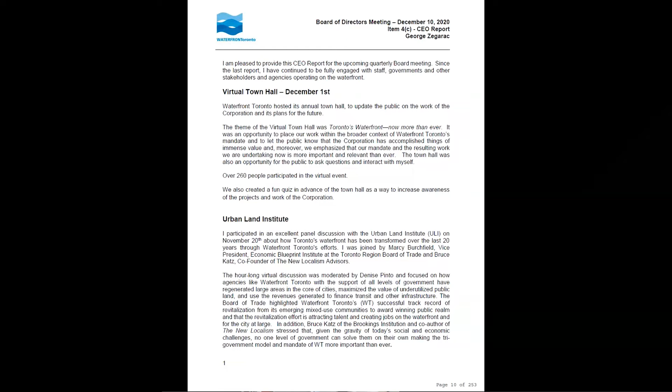We also, on our mission, and I give Wendy Cartwright the credit for steering us to some work that the McCarthy's firm has undertaken with regards to Indigenous inclusion, both Steve and Wendy joined us along with some staff to listen to the journey that they've taken. I think we are well underway in terms of building on what they've done, but it was useful to look at what others are doing.

I would say that we have a very aggressive program going forward to deal with inclusion and diversity. This will be a long journey, but I just want to thank everybody who undertook the training course. I thought the feedback I got from those who participated was very positive.

So, Steve, I'm not going to go through the whole report. If people have questions, I'm willing to take them.

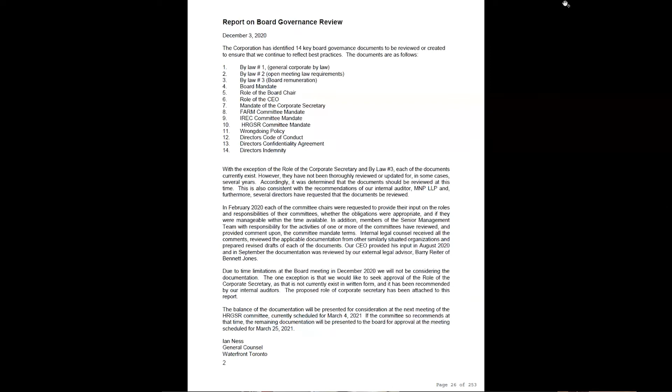There were some comments that came out, and those were addressed and subsequently reviewed by the committee chair. I'm happy to answer any questions, but if not, there's the resolution in your materials. As I say, I'm happy to either entertain the motion now or answer any questions. Well, I think we should answer any questions that anybody has, and then we could go on to the motion. Does anyone have any questions about the mandate of the corporate secretary?

Okay, well then, why don't we move the motion that the board approve the mandate in the form that's been presented? Could I have someone move that? I'll move it. Okay, thank you. Second it. Thank you very much.

Now, I'd add an item on the agenda that isn't before us, but I would like to ask for a motion to approve Jack Winberg as the new chair of the IREC committee. If there's any discussion about that, I would just ask someone to move that and second it. I'll move it. Okay, thank you. I wanted to move it, but I'll second it.

Perfect, perfect. Okay, so thank you, everyone. Thank you all. Okay, well, welcome, thank you, Jack. We really appreciate you stepping up.

So now I'm going to turn the floor over to the David Kusturin show. David, I think the next little bit is going to be taking us through a number of Waterfront Toronto priority projects, and I think the first is to give us that update. Then we'll go on to some of the approvals. David, I'll just turn the floor over to you.

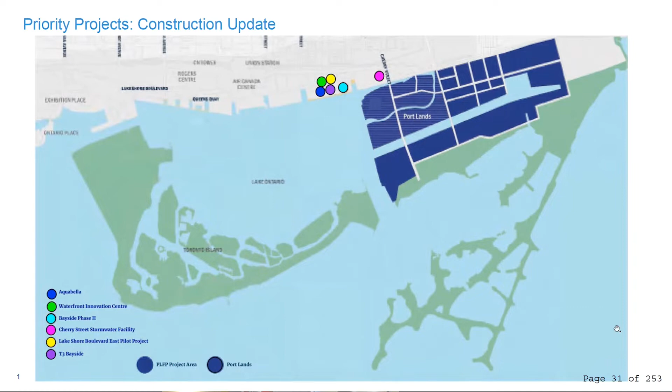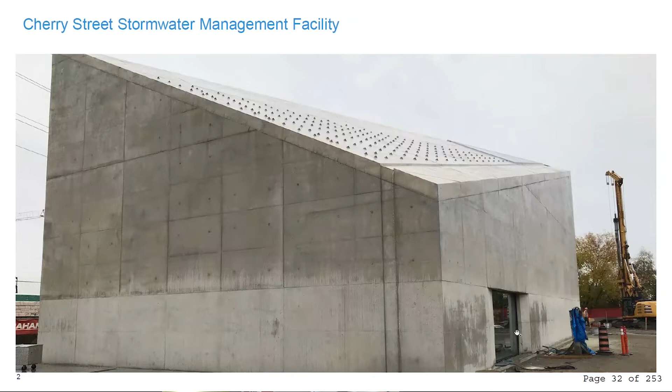To begin with, the stormwater treatment facility at Cherry Street. The exterior of the building is actually complete at this stage - it's a concrete building, an award-winning concrete building. It looks amazing, it's pretty spectacular, especially when you see it from the Gardiner. The work on the interior is just about concluded, but we do have probably about 3 months worth of commissioning.

It's a very complex building, complex equipment within the building that treats the stormwater. So that work will continue, but the building itself and the exterior work is coming to completion.

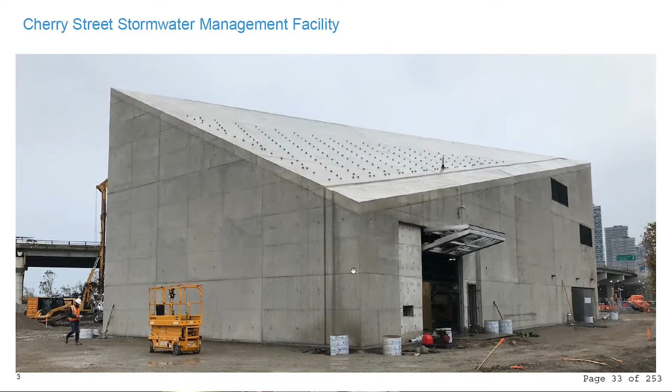I'd love to chime in and add that the design of that building is by Pat Hanson of GH3, and she's a member of our own design review panel.

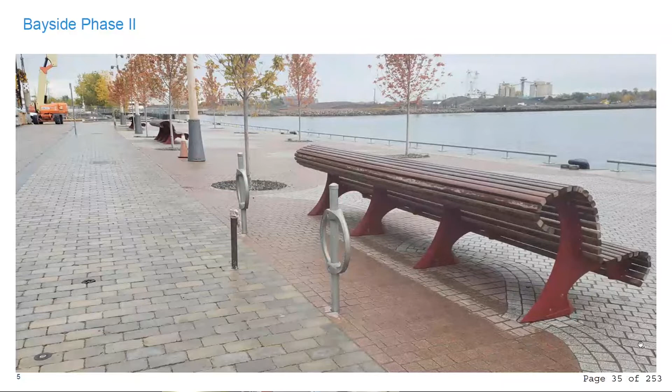In East Bayfront, Bayside Phase 2 work is complete. We have completed the Water's Edge Promenade up to the edge of the Aqualuna building. We haven't completed it around the Aqualuna building, pending construction of that by our friends at Tridel and Hines.

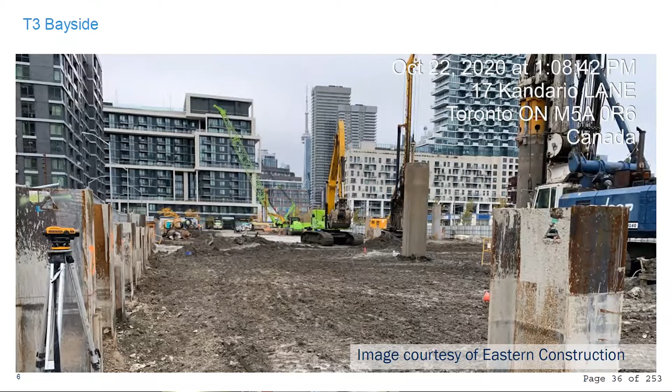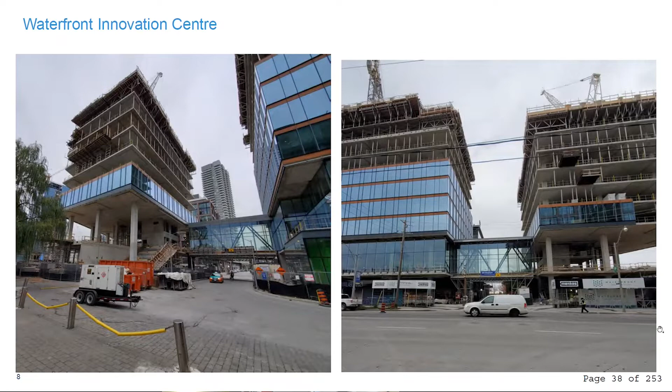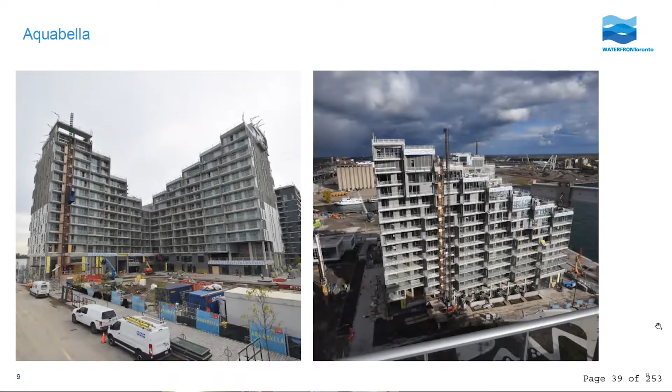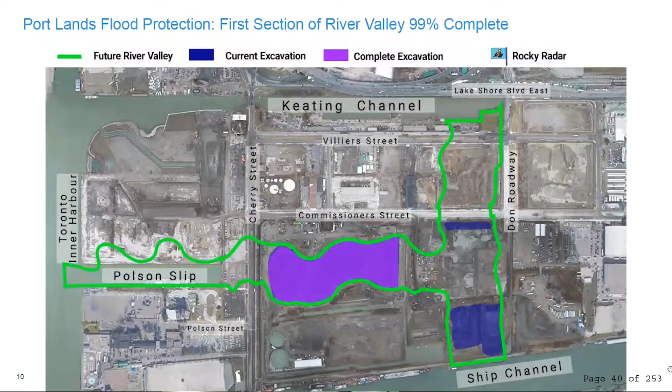In the Portlands, we have completed all of the cutoff walls now across the entire river, with the exception only of the east and west plugs at the Polson Slip and at Piers. And we have completed the excavation in the Central River Valley, the area in the middle shown in purple.

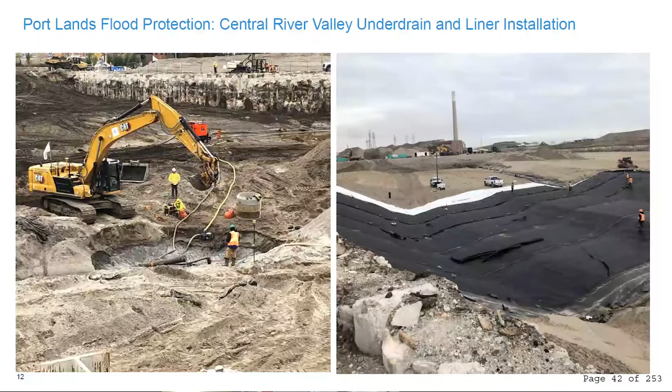So that work we anticipate to be done, for the Central River Valley, in the next week or so, certainly before Christmas, so that next spring we can begin construction of all the structures, the levees, and begin actual planting in the river sometime next summer.

We have also started excavation at the east side of the site, so the Don Greenway up from the ship channel north towards Villiers and the mouth of the Don. That work will continue over the winter.

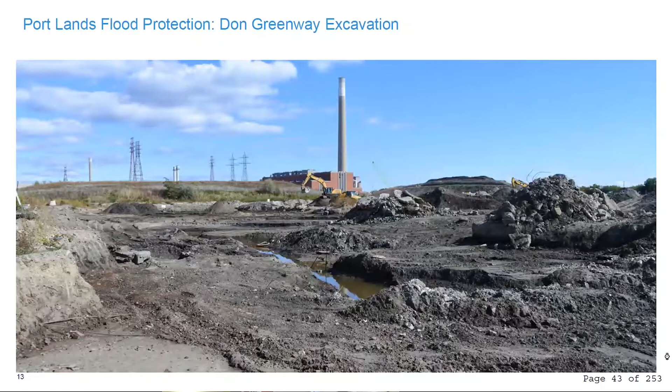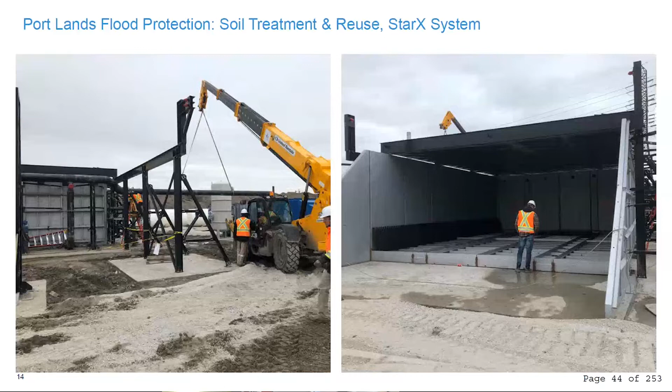Any VOCs that are captured or released due to the smoldering go through carbon filters before they are released, so there are no noxious odors or elements released to the environment. Is that a one-time thing and then the soils are now clean? That's correct.

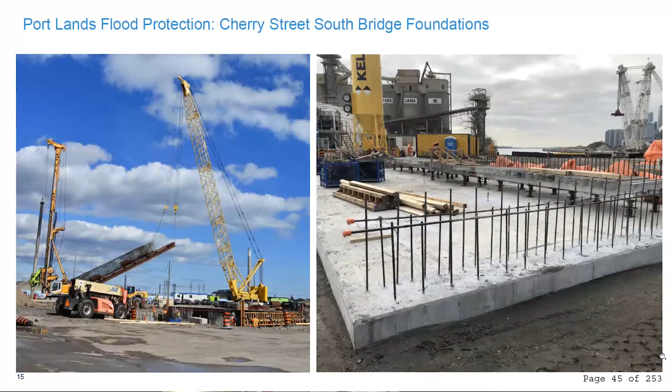We have now completed the Cherry Street South Bridge foundations, for the bridge that crosses the river itself at essentially the Polson Slip. Those foundations are now done, and next spring, summer, we'll see the Cherry Street South Bridge arriving from Halifax.

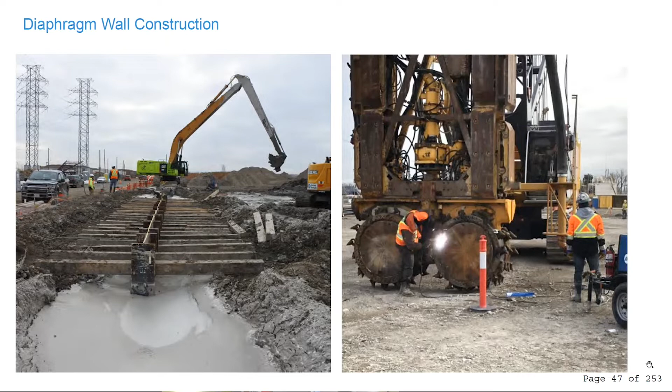As I mentioned, the cutoff walls are partly caisson walls, but the other sections are diaphragm walls. The contractors come back, and what you see here is the diaphragm wall, which is the cutoff wall plug at the west end of the site at Polson Slip. This is done through a slurry wall solution where the contractor excavates out the soil, pours in a slurry mix, then puts concrete and reinforcing steel in and replaces that slurry with a concrete mixture to create these cutoff walls.

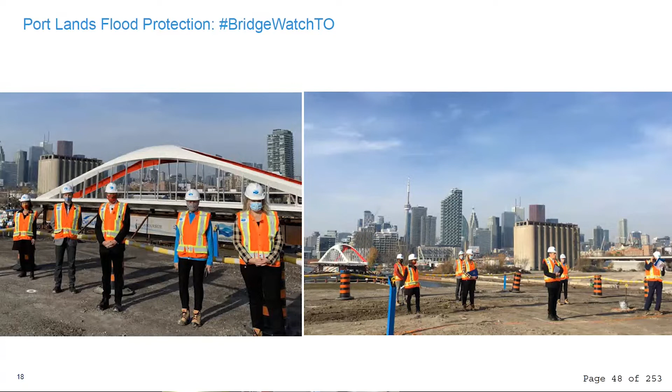And then, there's one slide after this, we did have the arrival of the Cherry Street North LRT bridge, so the first bridge from Halifax, and had a bit of an event with the federal, provincial, and municipal governments all attending and speaking.

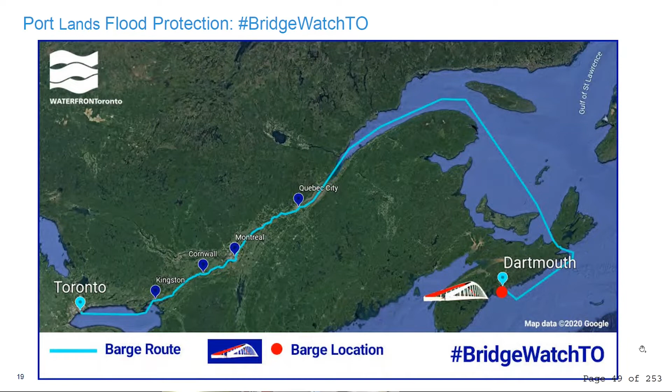Well, that's great, Dave. We've got a lot of attention on the bridge. It did. It was, as I understand it from our communications folks, one of the most highly engaged social media events. Something like 600,000 people were exposed in some way or another across various platforms, Facebook and Twitter, including photos from people all along the St. Lawrence River tweeting photos of the bridge as it went by.

And here you can see a photo that will probably be reproduced many, many times over the coming years, of the bridge with the city in the background.

And David, could you just remind us again the completion date of the project if everything goes well? I will, and you'll hear it again three times today, but it is March 31st, 2024, and we remain on schedule, in fact a little bit ahead of schedule for that date.

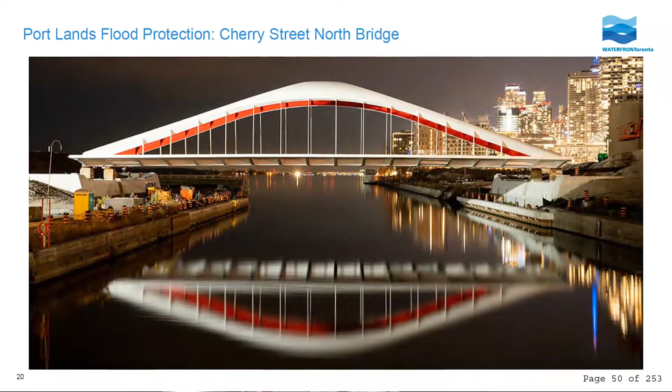Okay, so just some highlights here. This project is phase one of a two-phase project. Both phases are included in our 5-year plan and annual plan for 2021.

However, when we went to tender on this project, the market pricing was substantially over the contractor or consultant's estimates, and we elected not to proceed with the entire project at this time, essentially due to funding constraints. We don't have the funding identified and available at this point in time to address phase two, but phase two is not the key piece of work.

Here, the key piece of work is the in-water pipes. We have an obligation to get those completed so that we can fully complete and commission the stormwater treatment and stormwater management system for all of East Bayfront, and we need to do that in order to transfer all of those components ultimately to Toronto Water.

We are currently operating a number of the systems in East Bayfront and in Keating because the work is not complete, and Toronto Water has requested that we deliver only a completed system to them that's been fully commissioned and is functional. So we are looking for capital approval for phase one of the in-water pipe system, which is our last component to allow us to finalize and commission the stormwater treatment and stormwater management system across East Bayfront.

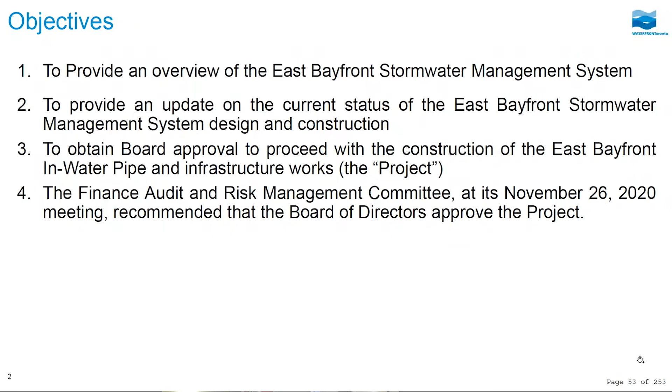I'd note that the Farm Committee did review and recommend this for approval at the last meeting. So phase one... yeah, go ahead.

So phase one is the actual in-water pipes and structures to support them. Phase two is the boardwalk, dock wall reinforcing, and public realm components. We had hoped to be able to leverage the in-water pipes project and complete the boardwalk and dock wall reinforcing at the same time. We're not able to do that, but we do have plans to do that in the future once we've identified and set aside funding to allow us to complete the balance of the work.

Let's see, what else do we say? Yeah, once this is completed, all of the treated stormwater that comes from Cherry Street stormwater facility will then be able to be returned to Sherbourne Common -- not all of it, but some of it -- in order to allow us to operate Sherbourne Common on the stormwater system as originally planned. And as I think you know, that stormwater is then used to feed the public art and the park water features in Sherbourne Common.

Next, I'll try to speed this up. So just the location, East Bayfront, as you can see. I'm going to move you through this fairly quickly, I know.

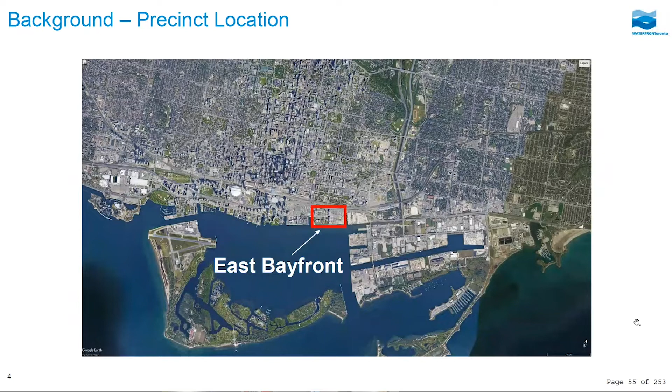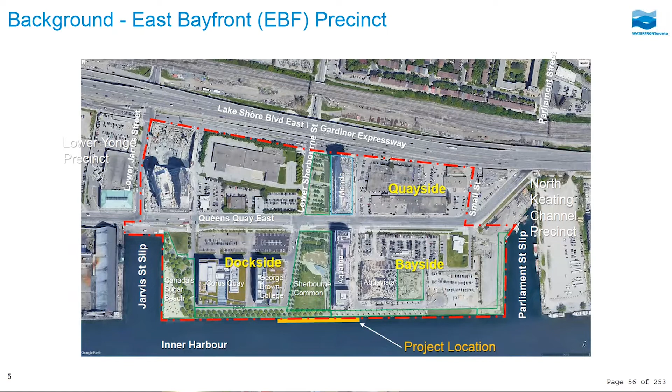The location is in Dockside and Bayside, East Bayfront, right in front of Sherbourne Common. Essentially what we're doing is connecting the Dockside stormwater treatment and management system to the Bayside stormwater management system.

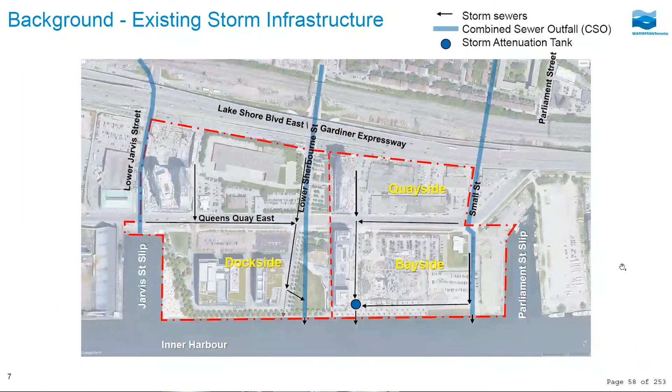Won't go through. No, keep going. Okay, you did keep going.

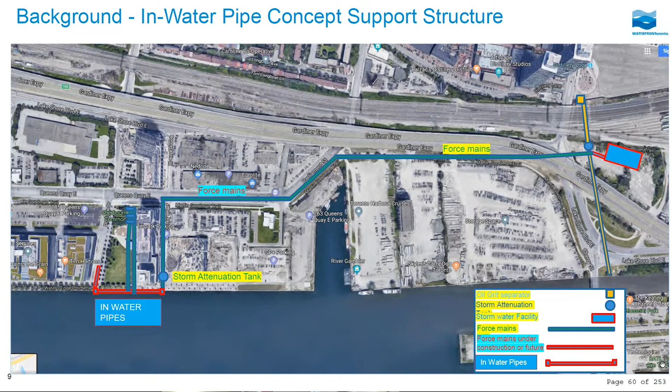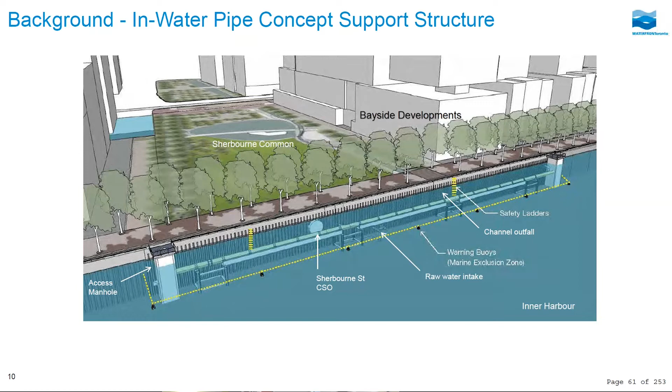This is what the project looks like. There are two pipes being constructed outside of the dock walls in East Bayfront. One pipe takes water from Bayside into the attenuation tank and then to Cherry Street, and the second pipe brings water back from Cherry Street into the Sherbourne Common Pavilion.

With that, we have to construct a structure to protect those pipes. This is a navigable waterway, so we've been working with Port Toronto and other authorities to ensure these designs are approved and acceptable. These structures will also in the future support the boardwalk and contribute to the public realm and dock wall reinforcement.

Just another view of what we're constructing. The boardwalk decking, as you see here, will be part of phase 2. The steel structure and the pipes will be part of phase 1.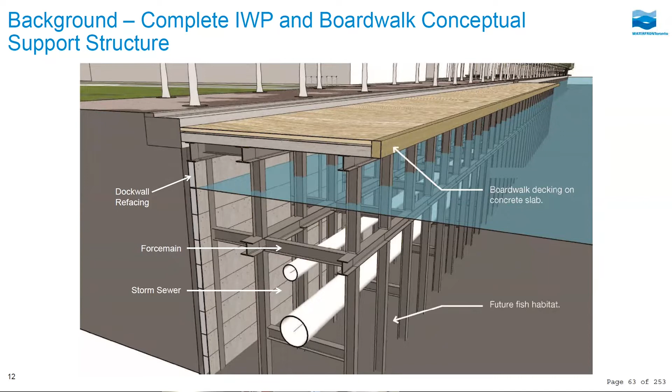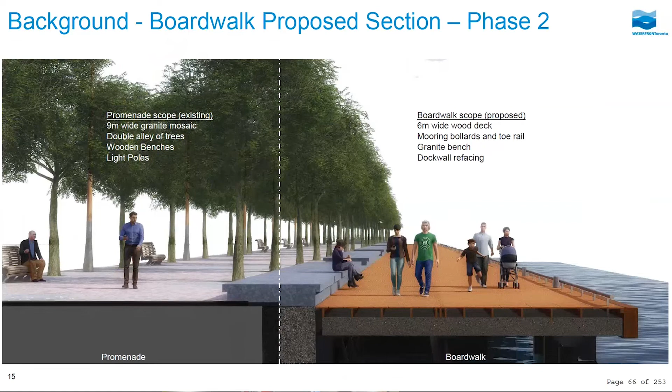Again, this shows what the phase 2 work is in red, and what that looks like in rendering. Ultimately, the full vision for East Bayfront is that the boardwalks will face the entire Water's Edge Promenade. This is part of our overall master plan for the continuous Water's Edge, which also includes a number of finger piers for boat docking.

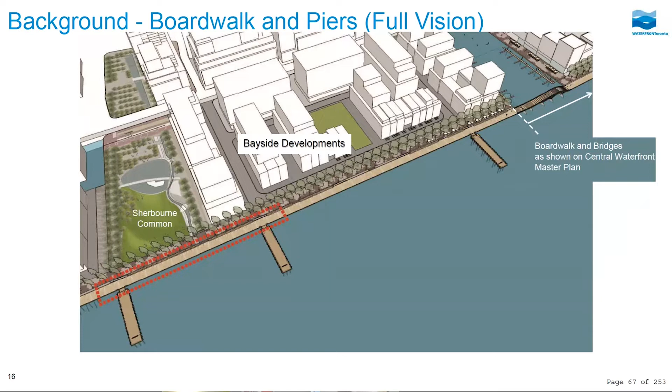So currently we are completing the procurement for the contractor for the phase 1 work. We have a number of approvals already, are working on the final approvals, and with the approval of the board, we'll be able to award the construction contract and start construction in the spring.

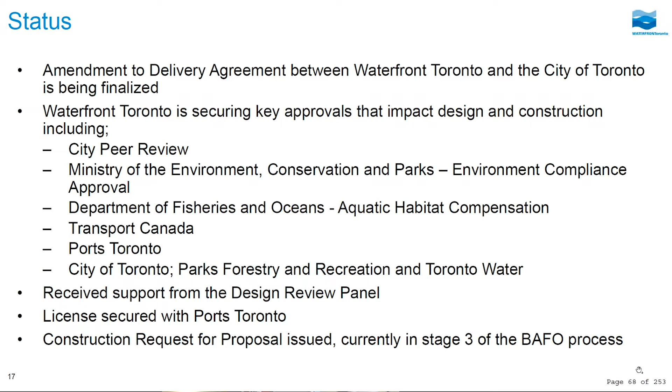Total cost for this work is 23.75 million: 17.9 in construction costs, soft costs of 2.2, and a contingency of about 3 million. We've included a fairly healthy contingency to account for the fact that this is all in-water work and is a pretty complex undertaking.

In terms of funding, the project is funded through land revenues as well as Section 37 infrastructure revenues, which will come from private developers' contributions. Those revenues are not secured yet; they are dependent on the private sector developers proceeding with their work. As such, we'll need to borrow about $12 million for a period of up to about 3 years to bridge those revenues being received in order to get the project constructed.

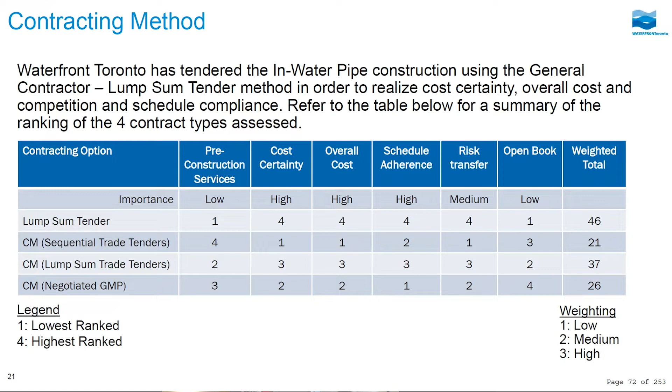In terms of construction, we elected to go with a lump sum contract tender method, so that tender has been issued. We do have the pricing, and we're just about ready to award once the board has reviewed and subject to the board providing approval to proceed.

In terms of risks, approvals, lake levels, impacts on the Water's Edge Promenade, and public access are all risks that we're looking to manage and mitigate through the project.

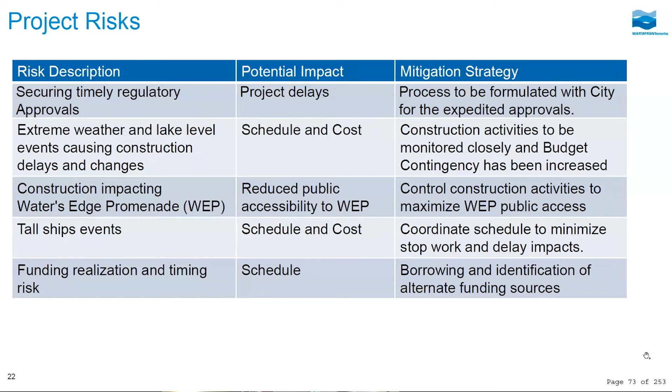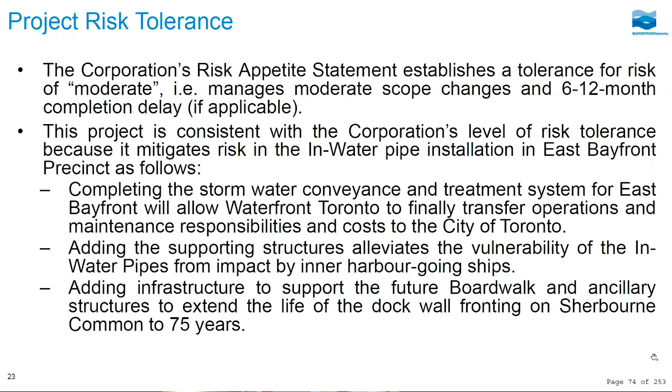The project complies with Waterfront Toronto's risk appetite as a moderate project. It's consistent in that completing all this work will allow us to transfer the operations, maintenance, and ownership of all the stormwater treatment and management facility work to Toronto Water. That work is in the order of $75 to $100 million in total once it's all collected together.

And then there's the motion for the board to approve. So if there are any questions or comments.

Yeah, David, I have one question before I open it up. In terms of the 8.4 million from the 37s, have you looked at the new legislation and how that may impact that number, or whether those projects are expected to be under the Section 37 regime? They're actually expected to be under the Section 37 regime because the projects we're talking about have had subdivision agreements with the city concluded, so we don't anticipate any issues surrounding that, Steve.

Right. Okay. Does anybody have any questions of David before we go to the motion?

Thank you. Okay David, now on to the next project, which I think is the Lakeshore Boulevard East Bridge and Public Realm. It is, and I'm going to give you a break from me and ask Julius to present this one. Okay, great. Thank you, David. Let's go to the next slide, please.

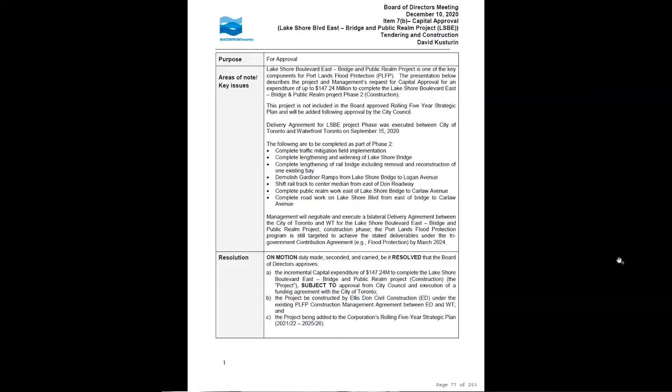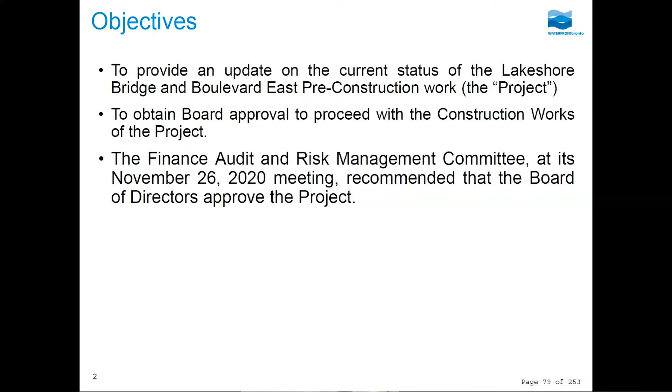So we're going to cover off today the plans related to the Lakeshore Bridge project extension and provide an overview of what's planned. We'll go through the parts and pieces of it.

We had previously sought and obtained approval for $16 million to do preliminary work by way of design. This is for the Lakeshore Bridge and the public realm extending to the east of the Don River. The delivery agreement was put in place with the city on September 15th, and we have not included this in the 5-year rolling plan as yet. That would be subject to approval of the board and ultimately approval of city council, which is pending.

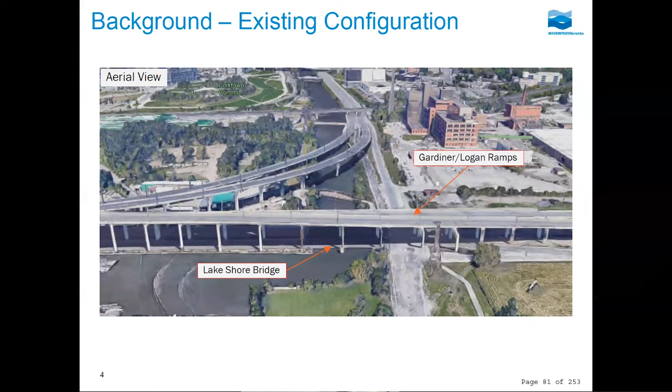To put this into context, we show here the Lakeshore Bridge as it stands today. The plan is to extend the bridge 2 bays to the west, or the left, and then prior to doing that work, we would now be removing the Gardiner ramp overhead, which makes the work easier. Next slide, please.

So originally, we planned to do the Port Lands Flood Protection work by the extension of the bridge of those 2 bays noted. Under that scenario, we would have had to work under the live and active Gardiner Expressway overhead, which is, in our view, somewhat dangerous. The Gardiner EA, on the other hand, then contemplated us, or the city, coming back and demolishing the ramps after the fact, after we completed our portion of work on bridge extension, and then doing further modifications to the Lakeshore Bridge itself with the ramps out of place.

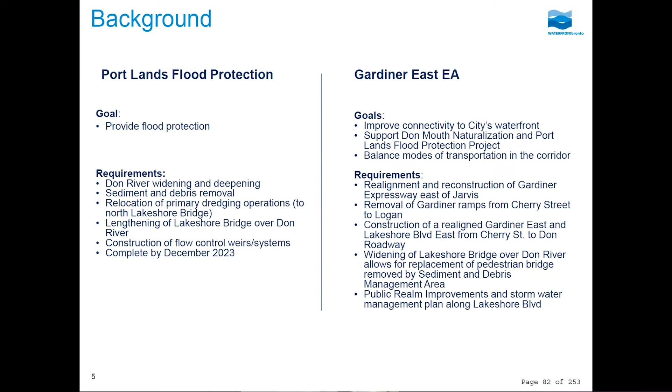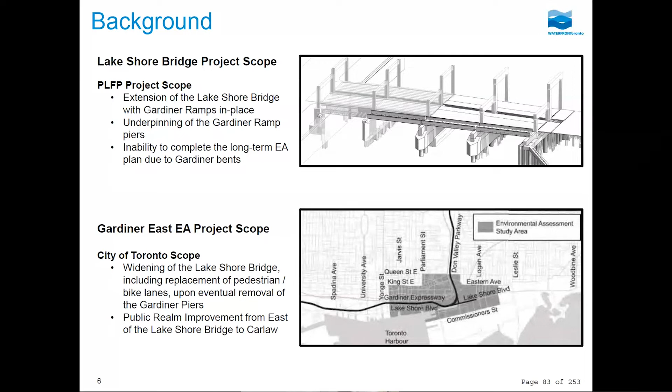Next. The big issue with this is that the original program would have broken the work into 2 segments with a gap in between, causing extensive disruption to traffic over an extended period of time, with the first program being completed over a couple of years, then a gap, then coming back. So through this, we compressed the overall program into a tighter schedule, minimizing disruption in the long term to users of the roadway. Next.

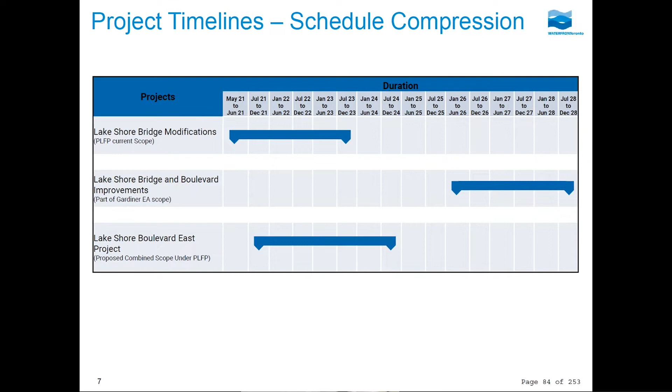With the work, we also will be completing public realm modifications extending significantly to the east. This involves installation of new public realm, bicycle paths, road modifications, and rerouting of the existing rail spur going to the Portlands to the center of the roadway, all part of this project. Next.

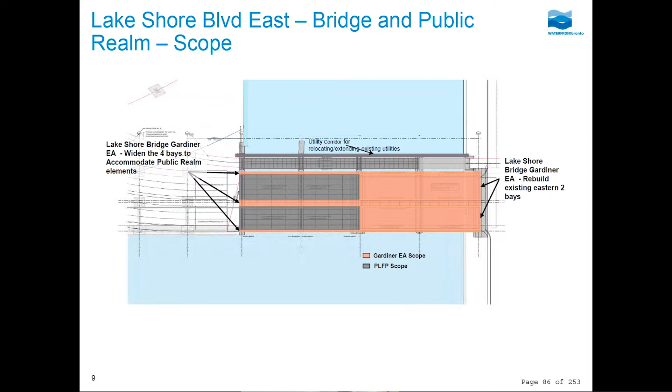In a section, again, we're showing what these conditions are. As to the public realm, or where we are with the project right now, phase 1 continues. So with the funding the city provided, we have completed, or continue with, design, traffic modeling, and traffic mitigation planning. This will continue through to June 2021. And we would be proceeding with procurement.

Could you go back, please, 1 slide? Thank you. Phase 2 would be the construction work, which would commence in July 2021. It would be an extension of the contract with Ellis Don, with sub-trades being tendered, and the design team then monitoring and overseeing the work being completed through the contractor. Next.

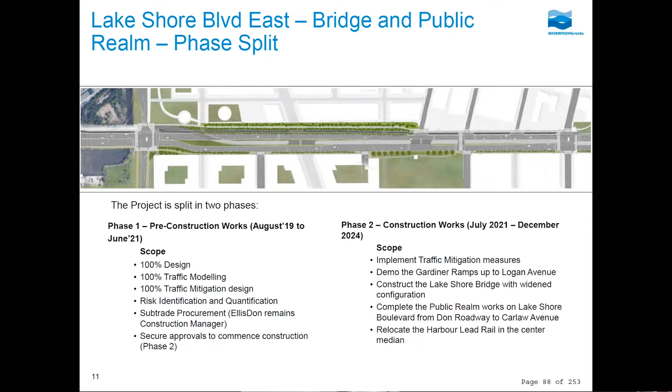At this point, we're 90% through the design process. We've received comments back and made adjustments accordingly and are working towards issue for tendered documentation. We look to have that out for procurement in January 2021, subject to board approval and city council approval. We would start construction proper in July of 2021 and complete the project.

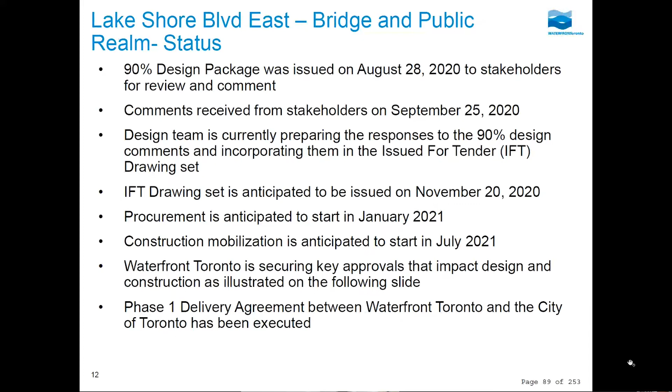I'll get into the scheduled completion dates afterwards. So we need the approvals noted. There are some permits required that are more extensive in this process, but manageable. Transport Canada has input because of the water works, as does Aquatic Habitat. A TRCA permit is required because it potentially impacts the program, but we've got that process managed.

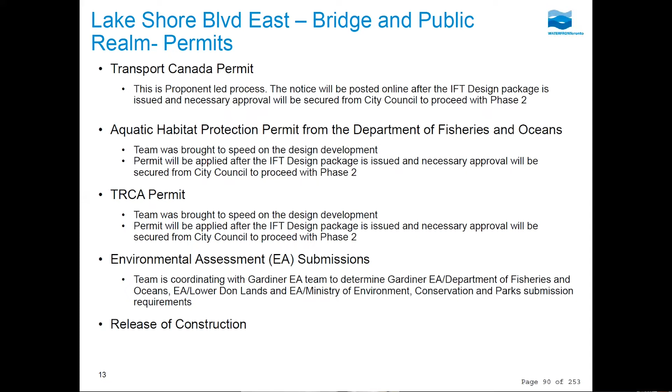A key piece are the environmental assessments. There are several that we need to tweak. These are not new EAs, but rather adjustments to existing ones, so we think that's manageable. And then we release for construction.

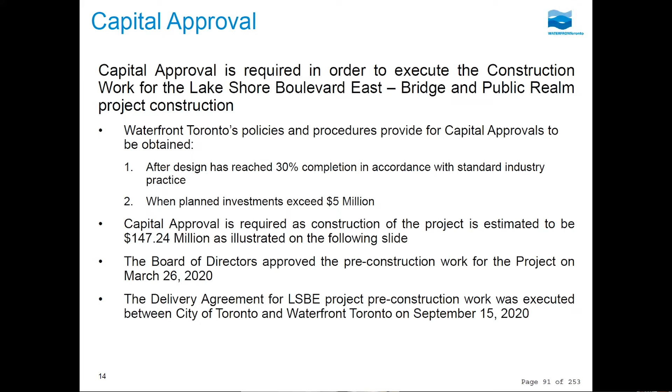So we're looking for capital approval for this program based on achieving 30% industry standard design, which we've exceeded actually. The project is over $5 million, so we are seeking $147 million that we'll go through on the following slides.

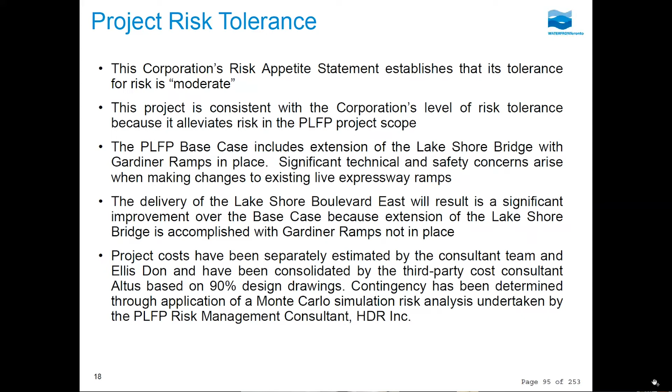Risk tolerance we now see as moderate. It's consistent with the corporation's tolerance standard. In this case, we think we've addressed risk factors materially by getting the removal of the ramps done prior to the bridge construction below, so we're not underpinning a live bridge environment. And we move to motion.

Any questions? Okay, well done, Julius. Any questions? It's Chris—I just have a fundamental question because I didn't have a lot of background on this. What's the primary purpose of this project? Is it to facilitate the works under the bridge, or is it in need of enhancement or widening? I'm just curious.

There were two EAs, Chris. One was to deal with the extension of the bridge to accommodate flood protection. That had limited result because the bents stay in place, and we couldn't complete the widening of the bridge. So the second EA would then remove the ramps, take the bents out, and allow the city in that scenario to complete that work. This combines the two and gives us a clean process through it.

The other issue, Chris, is that if we were just doing the Port Lands Flood Protection Project, we would be working, as Julius mentioned, under live ramps to the Gardiner, doing heavy construction. It makes the construction more difficult, and certainly makes it less safe. Then ultimately, as we excavated the river below the new bridge, we would need to underpin those ramps, spending millions of dollars to support a pair of ramps that are going to come down in about 5 years anyway. So it just seemed like an unnecessary waste of public funds to do that.

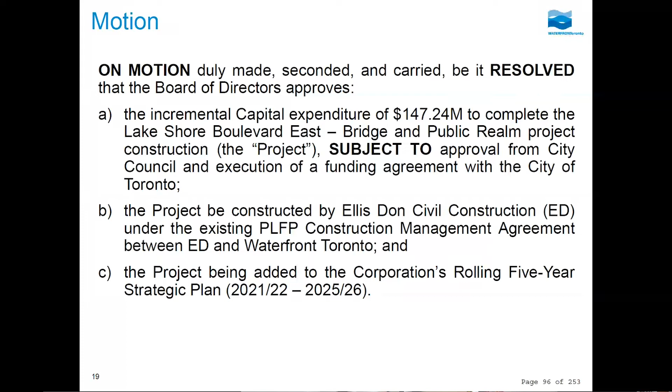Okay, does anybody have any other questions? Okay, great. Could I ask for Councillor Cressy to move the motion and Chris to second it? I'll second. Thank you. All in favor? Aye. Aye. Okay, thank you. Okay, thank you, David and Julius.

We're going to move on now. No, I think, sorry, did I miss one here or did we finish? No, there's the 90% stage gate. Right, so right. Okay, sorry. Okay, David, go ahead, thank you.

There are a number of issues that have arisen at the 90%, primarily the realization of the utility cost share risk, and I'll talk a bit more about that in the presentation. That has impacted on the contingency balance that we have remaining, which is, at the conclusion of 90%, $51.5 million in contingency. We have presented this to the Executive Steering Committee and to the Federal Government's Oversight Committee. The ESC has approved moving forward based on the analysis that we have done.

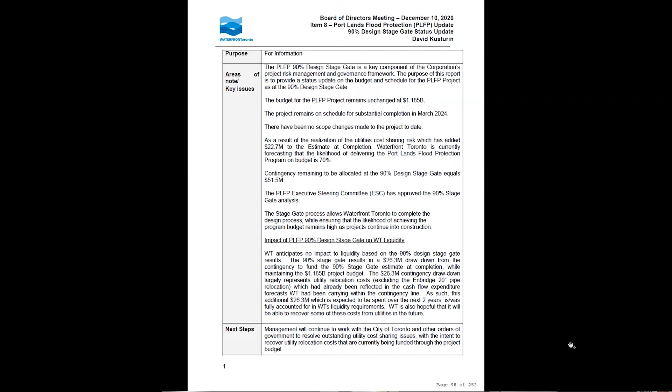I would just note there were some questions from the Finance Committee around considering liquidity based on the 90% design stage gate. There is no impact to our liquidity based on the 90% stage gate. We are continuing to reflect an on-budget completion. In fact, our construction costs, as you'll see, have really not changed from the 60%, with the exception that we are now needing to fund some work that we had that needed to be done regardless. So why don't we move on?

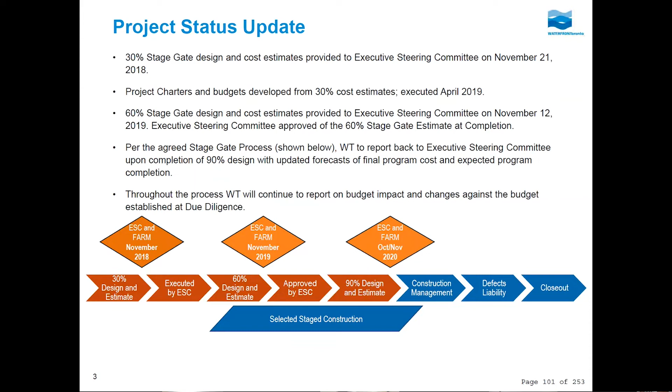So this is just the process. I mentioned the 30, 60, and 90% stage gates. We have now completed and are at the end of that process. Next, I won't get into a lot of detail, but essentially the process involves obtaining estimates from our consulting teams, an estimate from EllisDon. Those two estimates are then reconciled by our third-party independent cost estimator, Altus. Once that process has taken place, probably in the order of 5 months this time. Our first estimates we actually received in the early summer, late spring, for 90%.

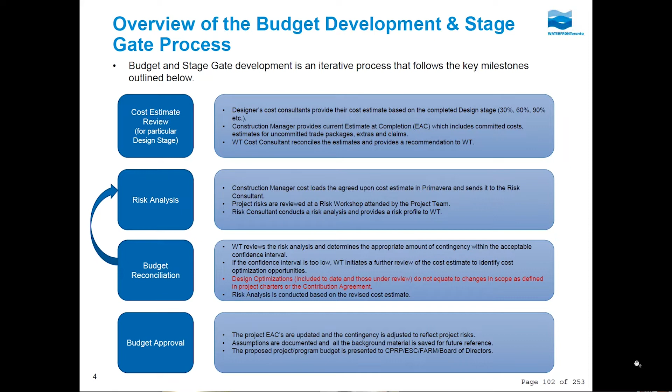So that reconciliation happened, also included, as mentioned by Kevin, a substantial amount of cost optimization to get to where we were able to get the risk consultant HDR to assess the risks on a quantitative basis to determine where we stand with respect to our contingency and our probability of completion. This is just the process to get us here, starting with the draft review or draft presentation in September, final presentation today to the board.

Bridges: 90% design on Lake Shore. We are at 100% on all of the other bridges, awarded about 65%. In progress 33%, with a small amount yet to be tendered to complete that work.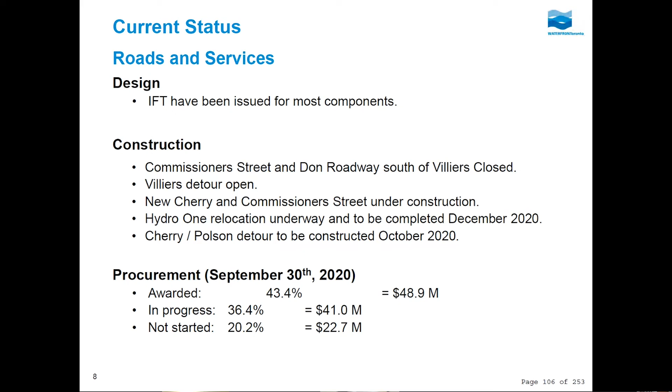However, we have been carrying since the 30% design a risk associated with utility cost sharing. When the project was originally budgeted, it was assumed that utilities would share in costs in accordance with the Public Service Works on Highways Act, which requires the utilities to fund a majority share of the cost of utility relocations. Utilities have balked at that and in fact have rejected that. We've been carrying that risk for some time, and as of this fall, we have begun to realize the risk.

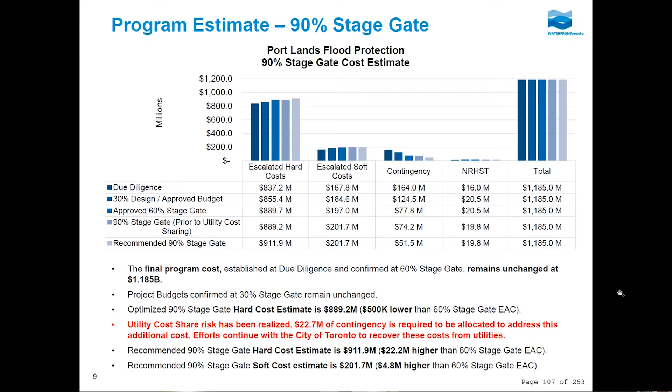That has resulted in us essentially transferring $22.5 to $22.7 million from our contingency to the estimate of completion as we have realized that risk, and the construction cost estimate has therefore been increased from 889 million to 911 million to account for that risk.

Next. David, what's left in the contingency budget? We'll get there, it's actually on that page. We're at 51.5 million after the utility cost sharing risk has been realized. Let's see, as you can see here, this is the Enbridge number.

So with the 51.5 million, one of the risks that hasn't been fully realized yet, but is certainly substantial, is the relocation of Enbridge, which is estimated at 70 million. Obviously, if we were to realize that risk, the Enbridge costs would involve us exceeding our remaining contingency and exceeding the project budget, by about 15.4 million over the 1.185 billion.

Although that doesn't account for any of the other risks that we are still carrying contingency for. So it's probable or highly likely that the budget exceedance would be substantially higher than 15 million were the Enbridge risk to be fully realized.

And what's going on with the tendering in terms of construction costs these days? We're seeing both positive and negative impacts. You'll see in our report, the report on COVID risks, we've incurred some additional costs as a result of COVID-specific impact on one of the subtrades. But we haven't seen it translating into huge impacts on our tendering or on our project construction.

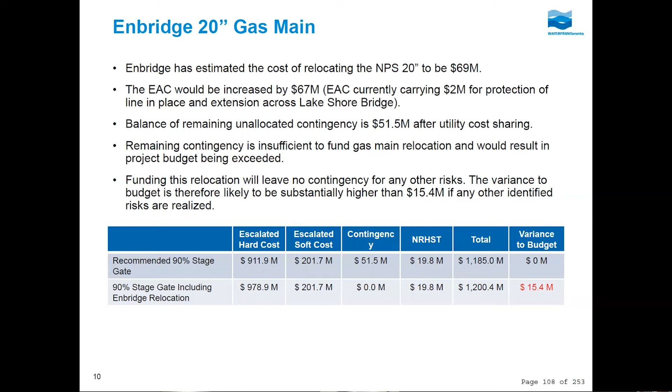Thank you. With respect to soft costs, I think is the next slide. Increase of about 4.7 million. That has to do with some very specific issues. There were increased construction administration costs due to one of the subcontractors being substantially delayed on site and requiring us to continue to provide site inspection during that delay.

We've also been looking at the design of the sediment and debris management area in quite an amount of detail, and we've assessed and addressed some geotechnical challenges in the roads and in the parks that have resulted in some additional soft costs. So now forecasting about $201 million there.

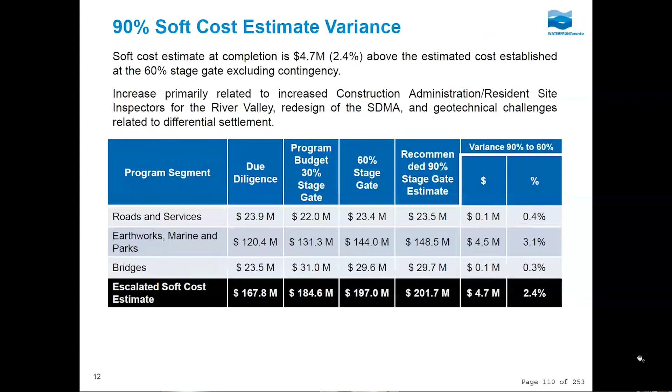Contingency perspective, carry on. Contingency at 60%, last year we were carrying 67 million. Of the original 124 million, there was 67 million remaining in contingency. Next slide.

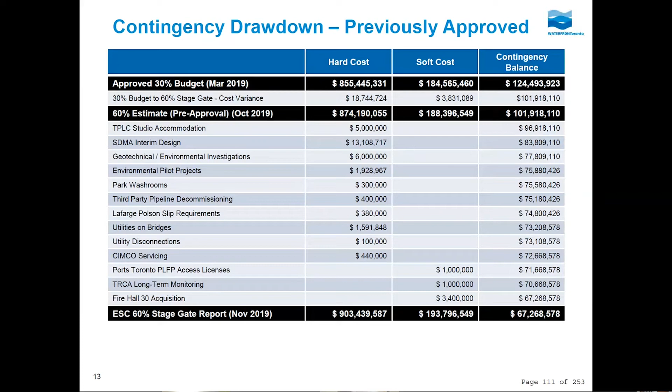Since then, between the 60% being completed and the 90% stage gate being completed, the contingency actually rose to 80 million. That was as a result primarily of two or three issues. One was the alternative design for the transit right-of-way. We had some substantial savings on one of our tenders, you can see $11.3 million, and we were able to fund some of the work that had been allocated to Portlands flood protection, reallocating the work itself to Cherry Street Lakefilling, to utilize the balance of that funding.

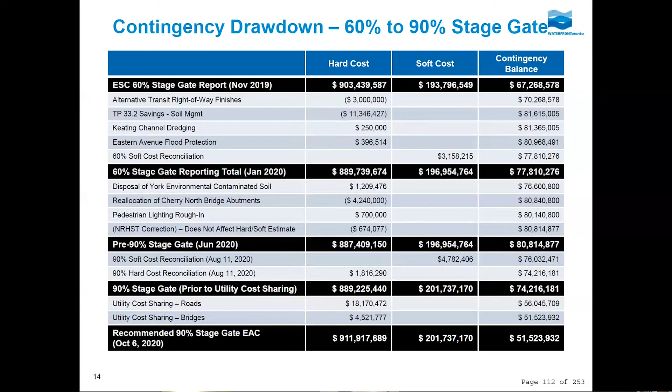At the 90% stage gate, prior to utility cost sharing, we had drawn down that contingency by about $6.5 million to 74, and we are now recommending, given that we need to carry the utility cost share risk as a realized risk, further drawdown of the contingency to 51.5 million remaining. We're going to talk about what that means from a risk perspective.

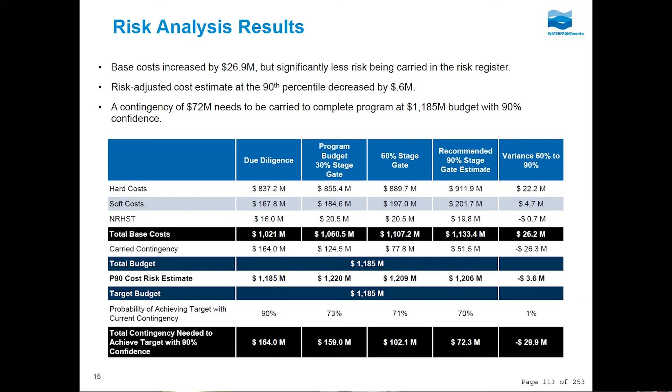At the 30% stage gate due diligence we had set 90% probability of achieving target. At 30% we were at 73%, at 60% we were at 71%, and now we're at 70%. So fairly consistent over the last 3 years in terms of our probability of completion. In order to go back up to 90%, we would need a contingency of in the order of 72 million. We and the city are continuing to pursue ways to obtain reimbursement from the utilities for these issues, and if we're able to do that, that money will go back into the contingency.

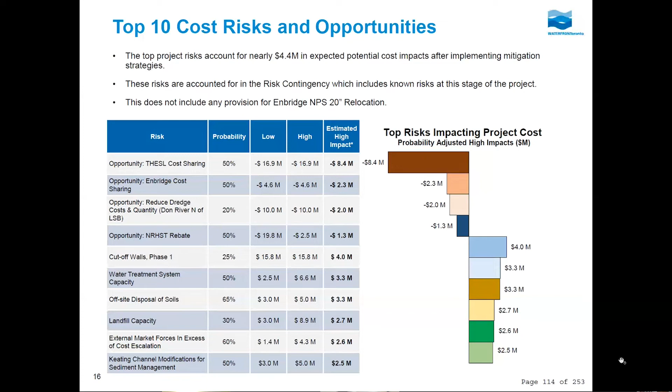Just some of the top risks. In fact, the top risks are actually opportunities - the opportunity for obtaining reimbursement for a variety of the cost-sharing risks, hydro and Enbridge specifically. And then we do have our other cost risks, including disposal of contaminated soils. We do have a risk related to the cutoff wall contract and a claim that's been received there, water treatment capacity, and some others. Next, top 10 schedule risks.

Finally, with respect to the risk, we are proceeding based on the center S-curve here, which at 1.185 billion shows a completion around 70%. On the left, if we were able to recover that 20+ million from utilities, that shows where the probability would increase to 88% completion.

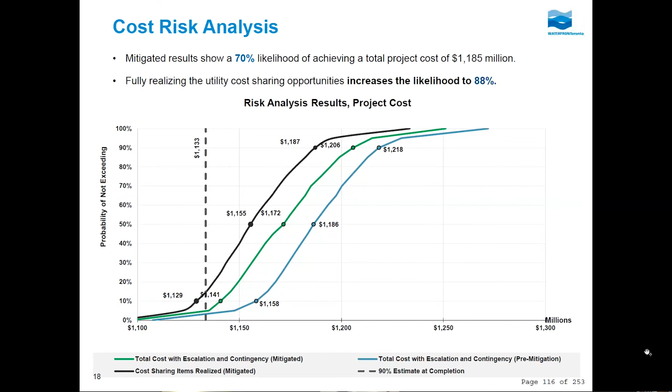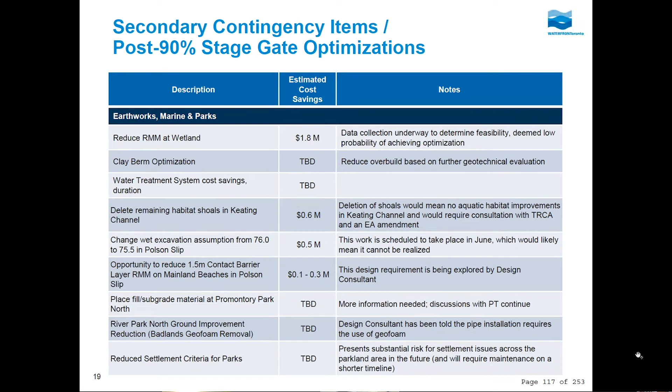I'm not going to go through all of the detail on optimizations. There are a number that we are still pursuing that haven't been included in the estimate of completion. You can see them here, either because we're not sure that the city or the authorities will accept what's being proposed, or the details and costs aren't fully known. But there are substantial optimizations that we are still pursuing, and in fact many that we have already incorporated. I would note that none of these optimizations reflect changes in scope - we are still delivering on the scope of work as defined in the contribution agreement with the 3 levels of government. What we're dealing with here are simply means and methods of construction or finishes.

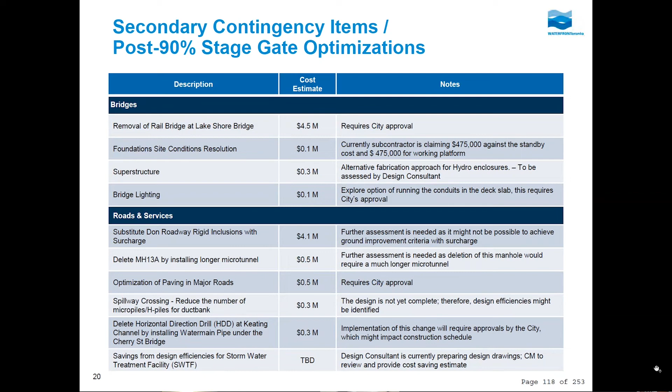We have multiple ways to do certain things. We can seed lawns, we can sod lawns, we can do many things, and what we're trying to do is optimize those solutions as best we can to respect and maintain the budget.

So we'll continue to manage the risk issues. We are laser focused on the Enbridge 20-inch gas line - we'll talk about that in closed session. And we will continue through the process to explore optimizations and develop cost savings to return funds to the contingency. Thanks, Ino, I think that's it.

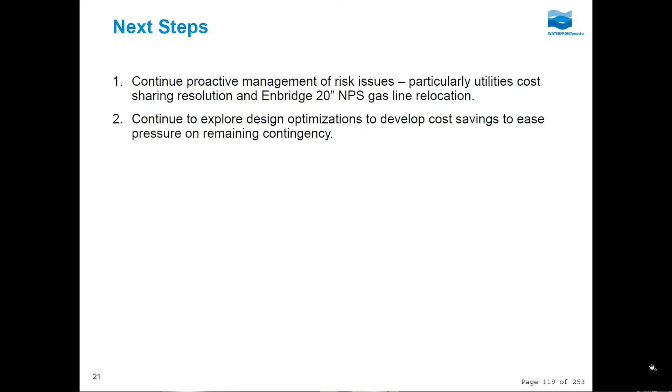David, first of all, thank you for that presentation. Considering you're in charge of what people have told me is the largest infrastructure project going on in North America, I appreciate all your hard work, because from beginning to end over such a long period of time, it seems relatively that we're in good shape. A couple of issues - I have one question, but I think what I'll do is see if anybody else has any questions before I ask mine. So I want to open the floor - does anyone have any questions to David about the report?

Okay, seeing that. So David, I just want to know on that issue with the utilities, what are the chances or odds, or what is the opinion we're getting about being able to recoup those costs? Because I'd certainly like to get back up to 88%. Can we raise that in closed session, Steve? Okay, great, we'll do that in closed session. So I don't think there's anything to move there - is there on this? It's not, just for information. Okay, great, well thank you.